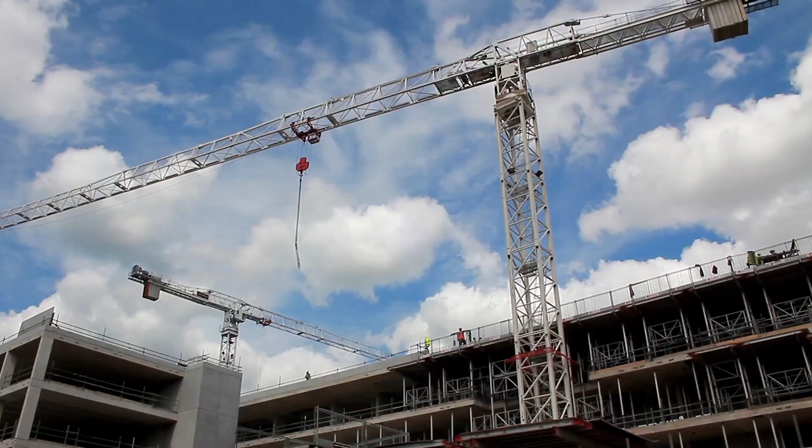Each Czech produces 537 kilograms of municipal waste a year. However, this amounts to just 1/5 of the total Czech waste production. Another 4/5 are produced by industry and other operations. Under the law, this waste must be handled responsibly by its producers.

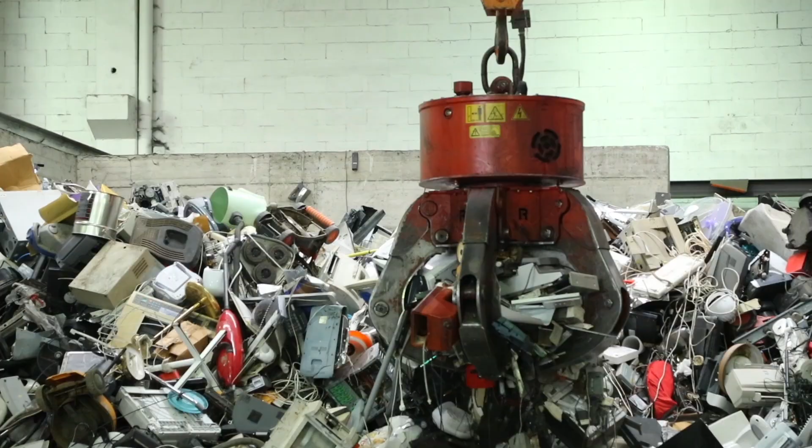Waste from households, commerce and services, the so-called municipal waste, totals 5.7 million tonnes per year. About 40% of this waste is sorted by people into colour-coded containers and in waste collection centres. It is then recycled or composted. And what about the non-reusable waste residues?

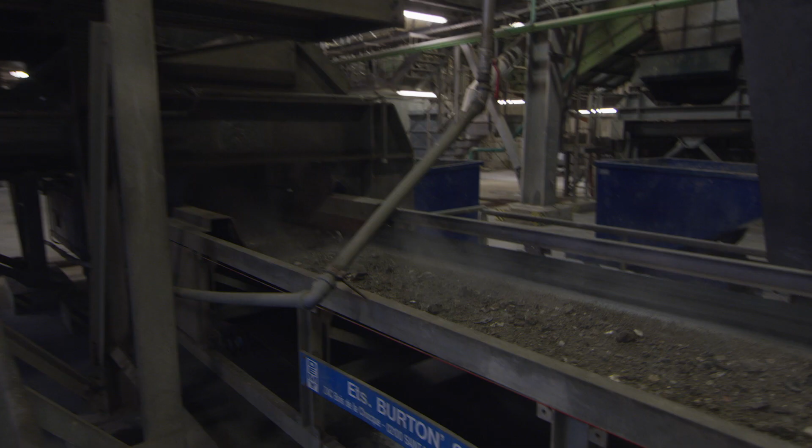A modern and preferred solution to this is waste to energy. Waste recovery, or its legitimate disposal, is also a hygiene obligation. A conventional incinerator only serves to inertize organic matter in waste by incineration, but incinerating can get smarter. Energy from waste is based on thermal treatment of waste and subsequent heat and electricity generation.

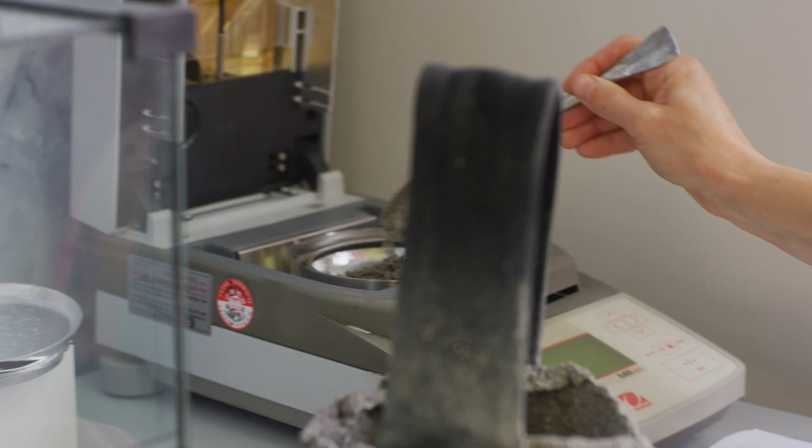These facilities are subject to very stringent European and Czech laws defining technical conditions for the operation and strict emission limits for the monitored pollutants. Waste-to-energy facilities are now part of modern waste management in many developed countries, including the Czech Republic.

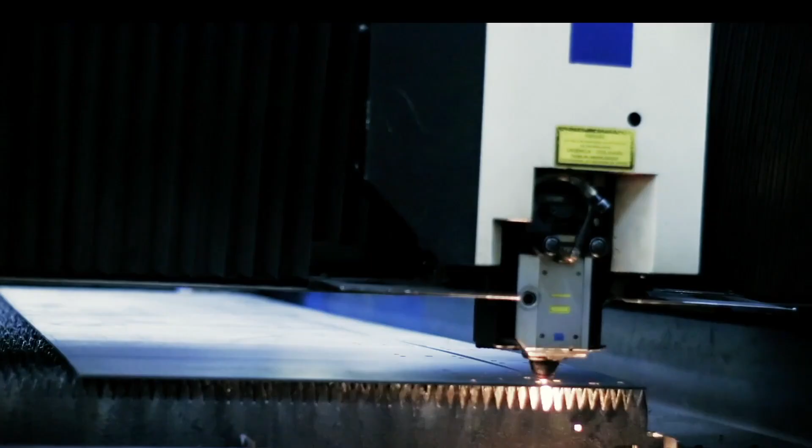At the end of 2015, the European Commission adopted a legal framework for the so-called circular economy throughout the EU. It is based on the fact that we must think about the maximum possible use of everything that the product contains at each and every stage of the product's life cycle. This covers the raw materials, design, production, distribution, use, collection and recycling.

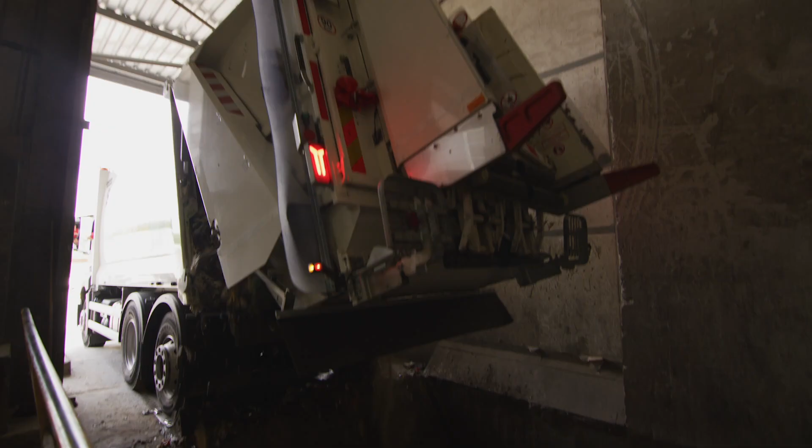Despite the best efforts, there is always some residual waste left at the end of this cycle, and even the residues must be recovered to the maximum possible extent to produce energy. According to data from the European Association CEWEP, there were 492 waste-to-energy plants operating in Europe in 2017. Currently, most of them are in operation in France and Germany.

The situation in Western and Eastern Europe is not the same. While in Belgium, for example, 18 waste-to-energy plants are in operation and serve over 11 million inhabitants, in Hungary there is only one plant for just under 10 million people. Denmark, which is smaller in size and population than the Czech Republic, operates 26 waste-to-energy plants. The Czech Republic has only 4.

The general trend in developed European countries is to reduce landfilling as much as possible and protect natural resources. In a number of European countries, such as Germany, Austria, Switzerland, France and others, landfilling of untreated municipal waste has been banned for many years, and most waste is used for energy production.

The 4 waste-to-energy plants currently operating in the Czech Republic are in Prague, Liberec, Pilsen, and the only one in Moravia and Silesia, SAKO Brno. How do we care about waste in Brno? The second largest city in the Czech Republic treats its municipal waste in a very responsible manner in all aspects. Thanks to our sophisticated system, less than 3% of municipal waste production is put in landfill.

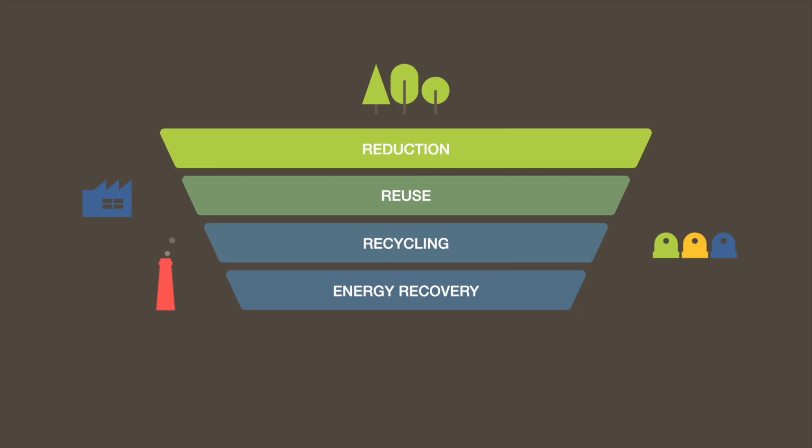Municipal waste disposal in the city of Brno is based on the principle of strict adherence to the following hierarchy. Primarily, it focuses on the reduction of waste production and its preparation for reuse. This is followed by recycling, energy recovery, and finally landfilling.

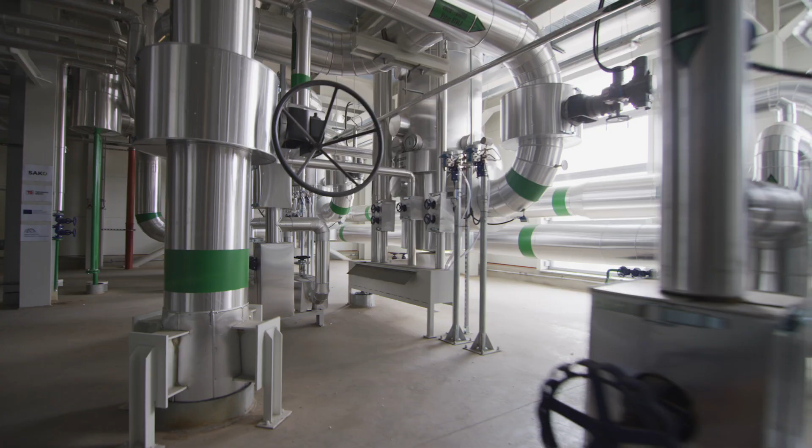Waste collection and the distribution of energy for Brno are ensured by 500 employees. SAKO has a modern fleet of vehicles, a sorting line and state-of-the-art waste-to-energy technologies.

And which waste is the best? The one that is not produced at all. This is a smart and responsible idea. Discarded but still functional items are given to those who need them and can still get some use out of them. Based on this principle, several reuse projects to benefit the public have been ongoing in Brno.

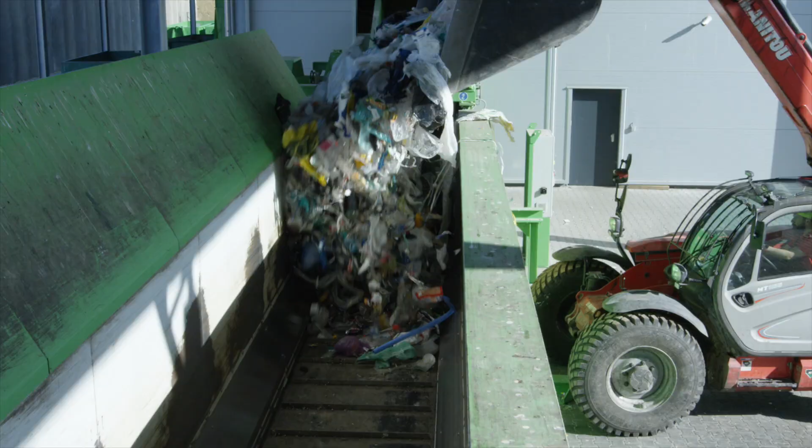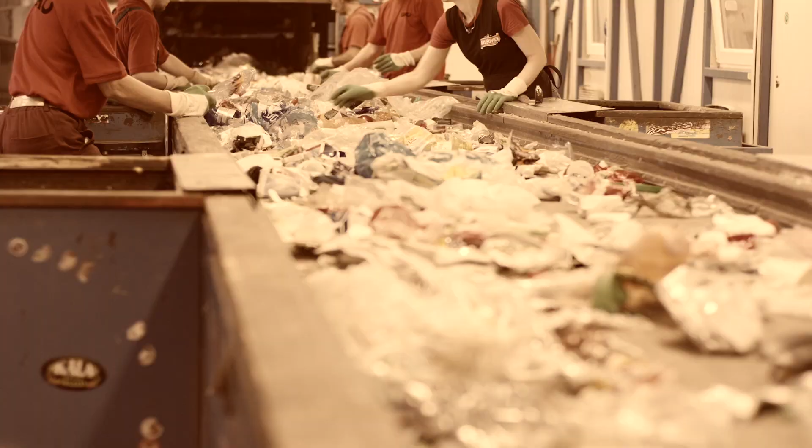SAKO Brno collects waste from the city and its surroundings into two facilities, the waste-to-energy plant and a sorting line. Since 2023, this line has been semi-automated and is the first of its kind in the Czech Republic. Where previously sorting was done only by hand, the automated process is now much faster and more efficient.

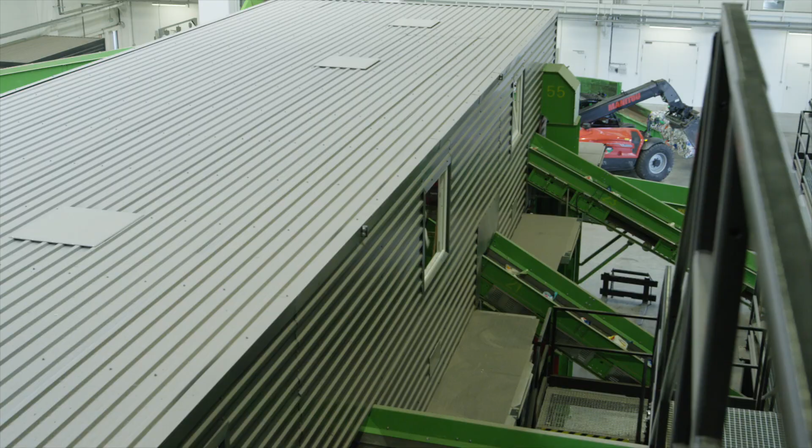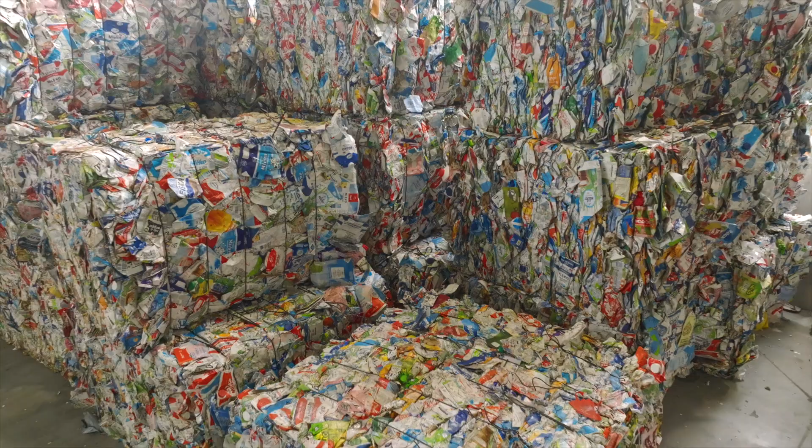A system of separators recognizes plastics by shape, composition and even color. It sorts the content of the yellow containers into 10 commodities, such as PET bottles, polypropylene, polyethylene, Tetra Pak and others. Magnetic and inductive separators extract ferrous and non-ferrous metals, such as food tins and beverage cans.

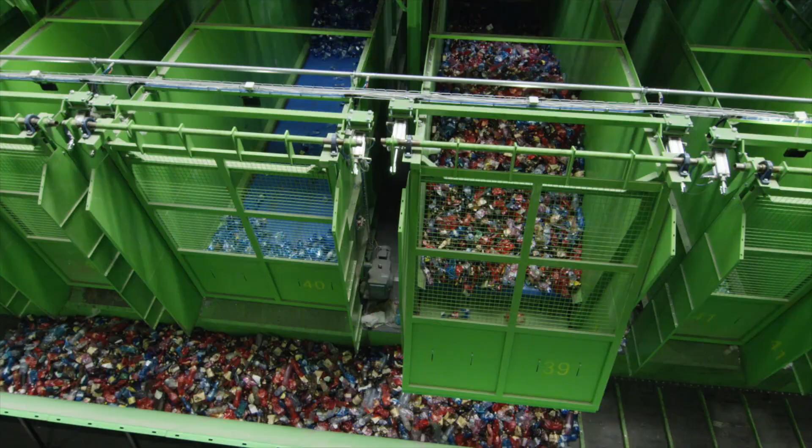The new line can process the contents of 2 full garbage trucks per hour and up to 15,000 tonnes of pre-sorted waste per year. It serves not only the city of Brno, but also other municipalities. This way we can now capture everything that can be recycled and ensure maximum utilisation of the sorted waste.

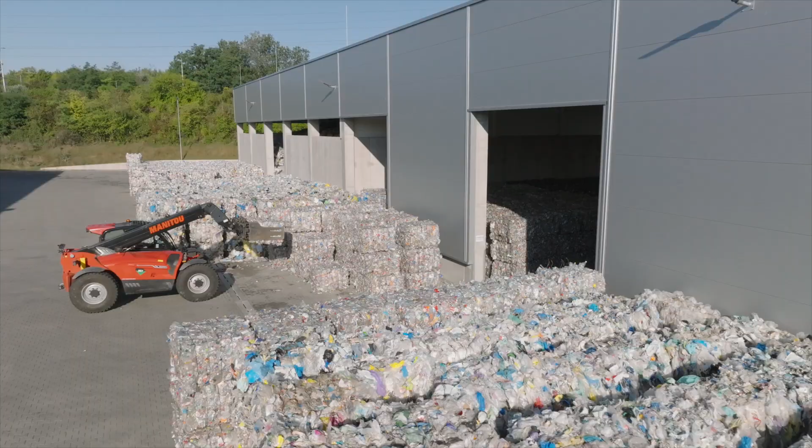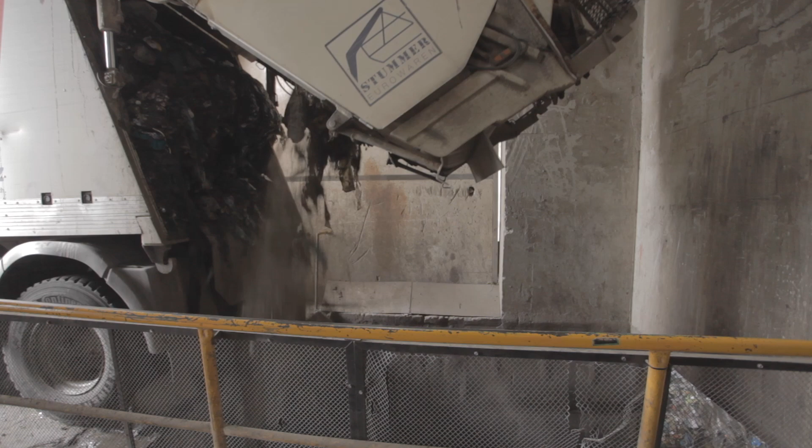The second facility located at the same address is the waste-to-energy plant. Let's go through the whole process from the very beginning. The journey of every waste starts on the weigh station. Weighing is automatic and is processed by special software. Collection trucks pass through a detection system that can detect sources of ionizing radiation. As a result, no radioactive materials hidden in the waste will enter the site.

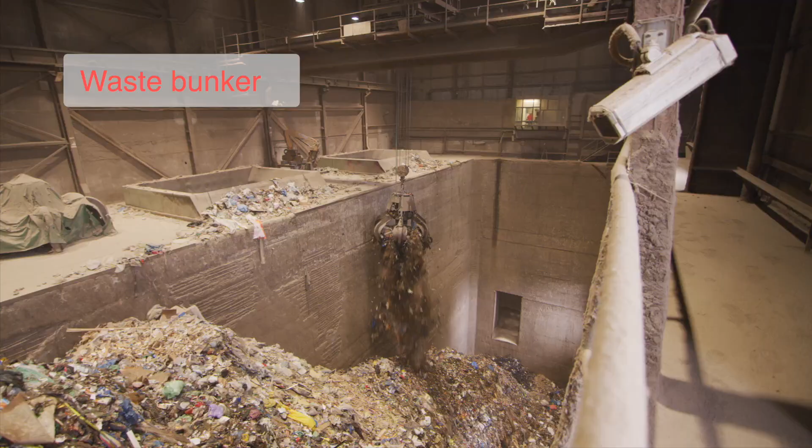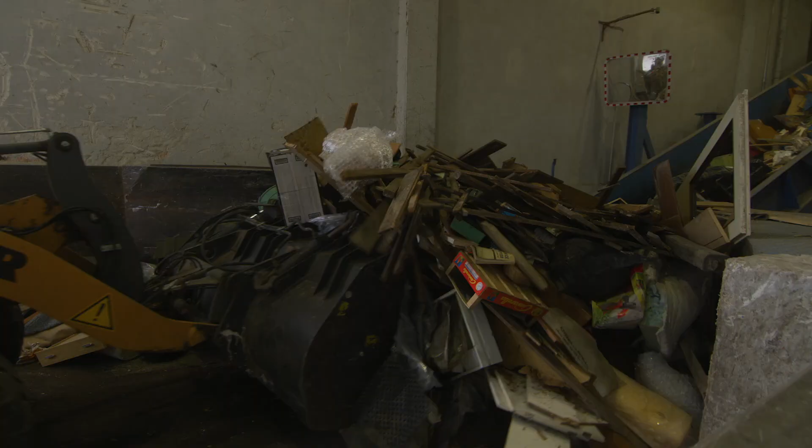Larger items are first fed to a shredder. A number of municipal waste analyses are performed 4 times a year in order to determine its qualitative composition. From a chemical point of view, the waste brought to the site contains almost the entire periodic table of elements. 2 polyp grabs extract waste from the unloading pits. First, they homogenize everything so that the resulting mixture has a similar calorific value. The grabs then feed the waste to individual boiler hoppers.

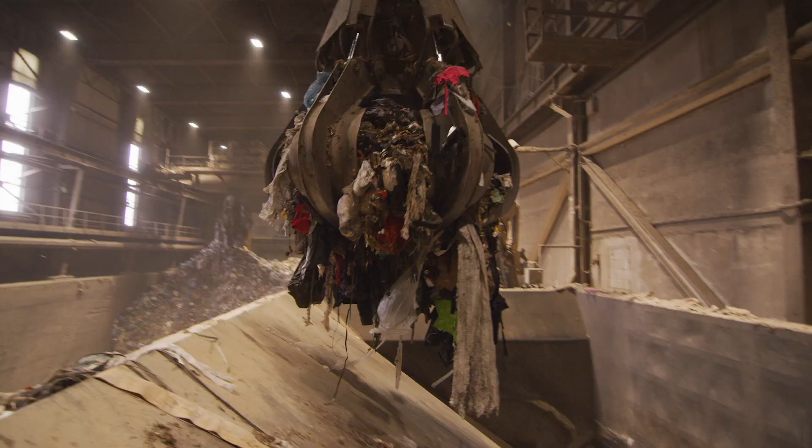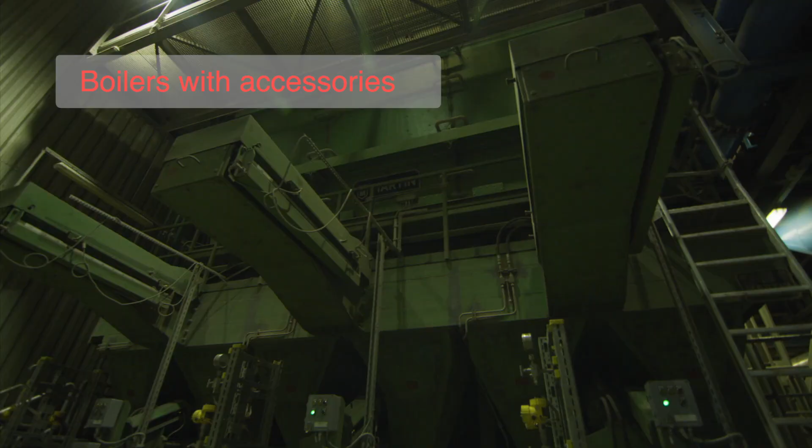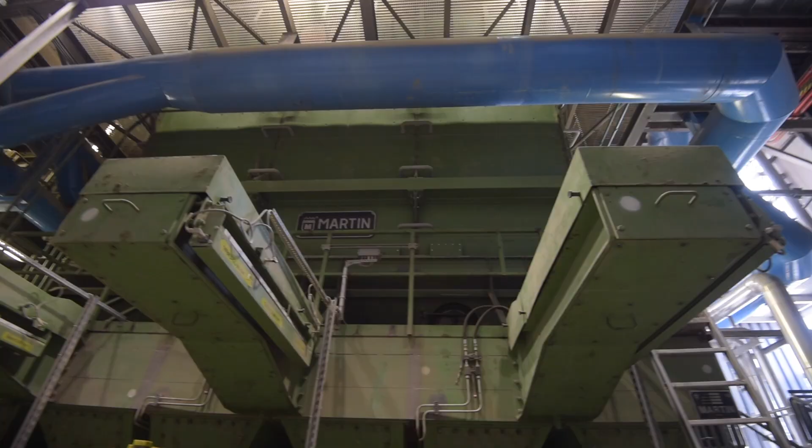A permanent weak underpressure is maintained in this bunker by sucking out the air which is used in the incineration process. As a result, the waste smells less and no dust is formed around the bunker. In the boiler room there are 2 vertical 5-pass steam boilers with reciprocating Martin-type grates developed specifically for solid municipal waste incineration. The waste passes through a water-cooled hopper and by means of a feeding device with a hydraulic drive is evenly distributed on the combustion grate of the boiler with an area of 45.5 square meters.

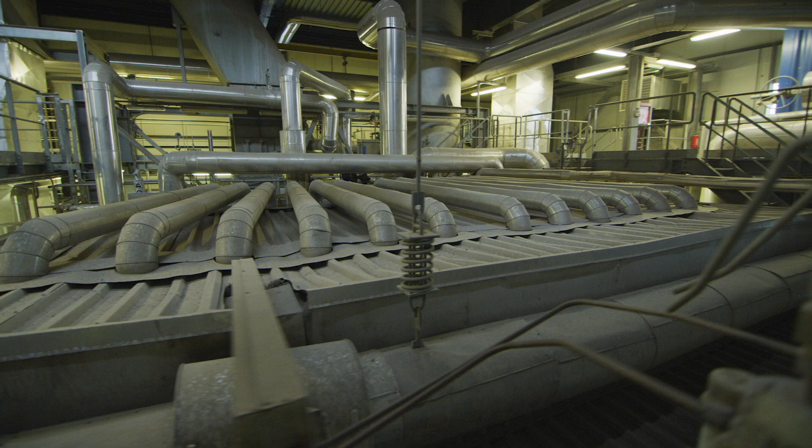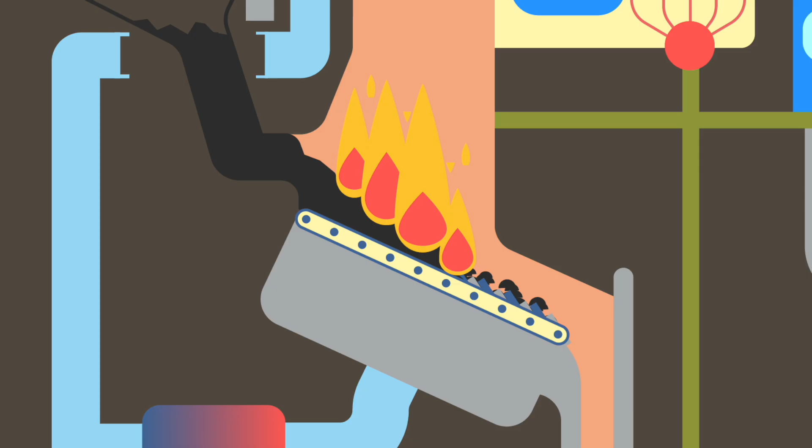This solution enables the setting of the optimal incineration regime according to the calorific value of the incinerated waste. The grate bar's movement spreads the waste over the entire grate area. This ensures a perfect burn of the combustible waste components and a low production of pollutants. The usual calorific value of waste as a fuel is 8 to 11 megajoules per kilogram.

SAKO supplies around 1 million gigajoules of heat per year to 100,000 Brno households connected to the district heating network, which covers 1/3 of their consumption. We supply around 50,000 megawatt-hours of electricity per year to the power grid.

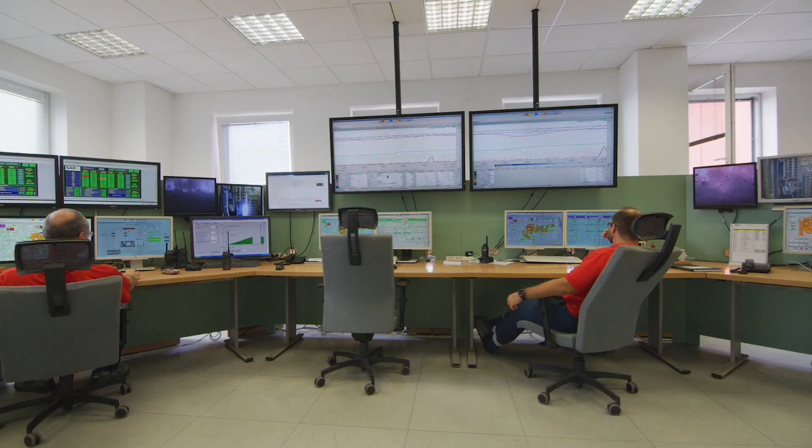The whole incineration process is controlled from the central control room. For a cold start, the combustion chamber must first be heated to 850 degrees Celsius using a natural gas burner. Waste fed to the preheated combustion chamber ignites immediately and no additional fuel is needed.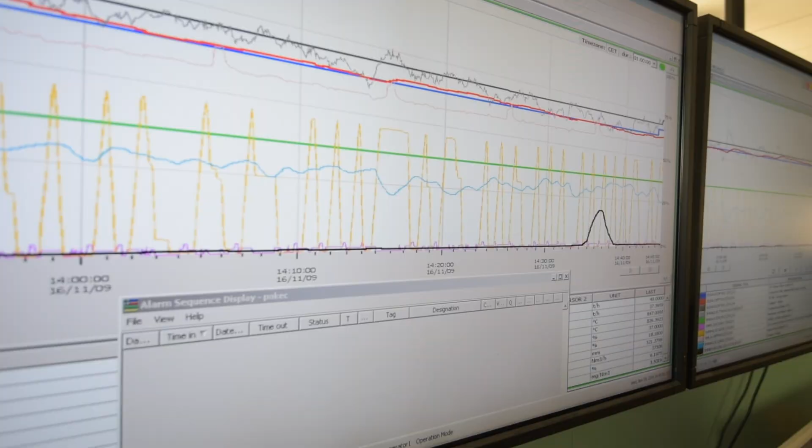Waste remains on the grate for an average of 30 minutes. However, oxygen is needed to ensure complete burn. Therefore, preheated primary air is fed to the boiler under the grate and secondary air over the grate.

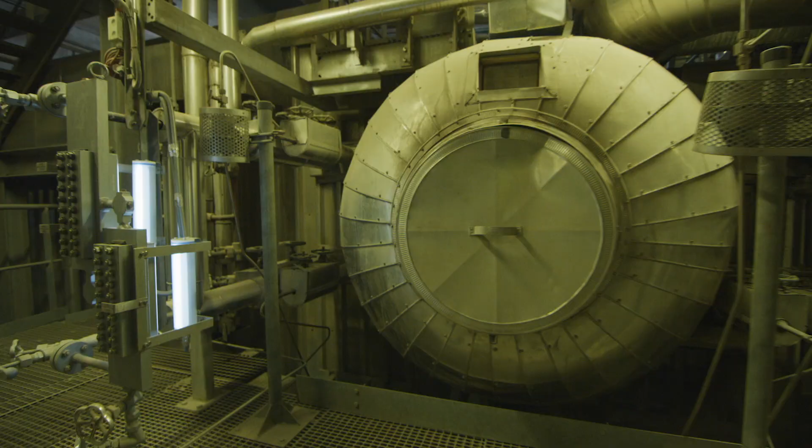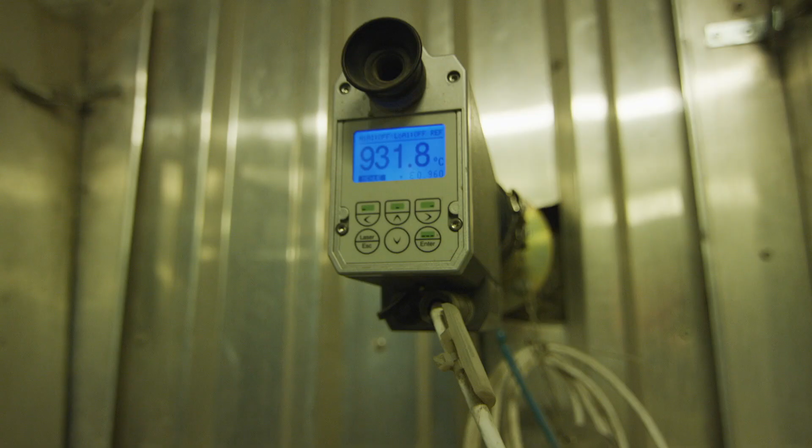The boiler itself is a water tube boiler with natural circulation and 2 drums interconnected to the evaporator and a 2-stage economizer. This is designed to ensure adequate flue gas retention time in the boiler combustion chamber. Organic matter burns down to carbon dioxide at high temperatures of 1000 to 1200 degrees Celsius, which prevents it from forming new thermostable organic matter.

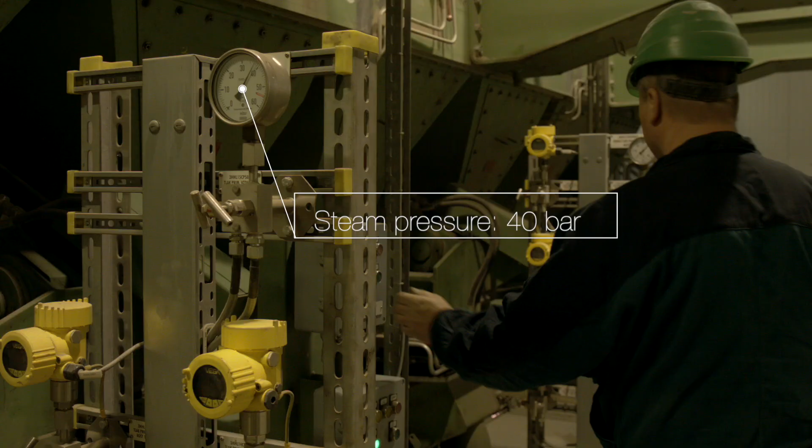From a chemical point of view, the combustion process is an exothermic reaction releasing the maximum possible heat. The released thermal energy is transferred to the boiler water system, which produces high-pressure superheated steam at a pressure of 40 bar and a temperature of 400 degrees Celsius. Superheated steam passes through a steam condensing turbine which has one controlled and one uncontrolled steam extraction.

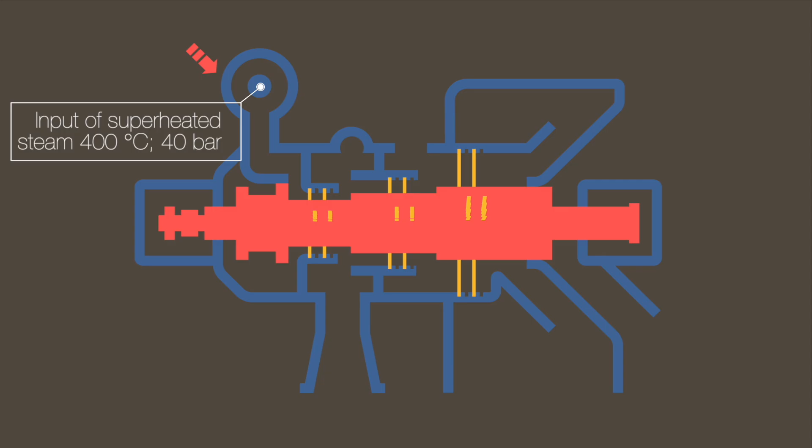The high-pressure superheated steam expands in the turbine and the kinetic energy is transformed into mechanical energy, driving the rotor blades to about 6,800 revs per minute and transmitting the mechanical energy through a shaft to the gearbox, which reduces the revs per minute for the generator. The generator transforms mechanical energy into electricity.

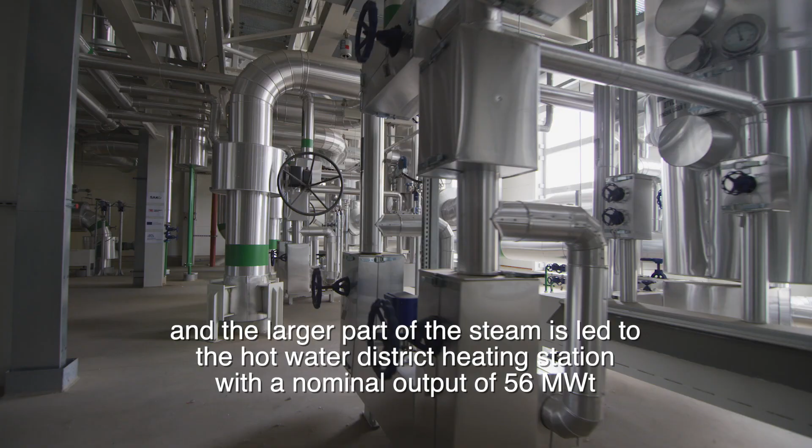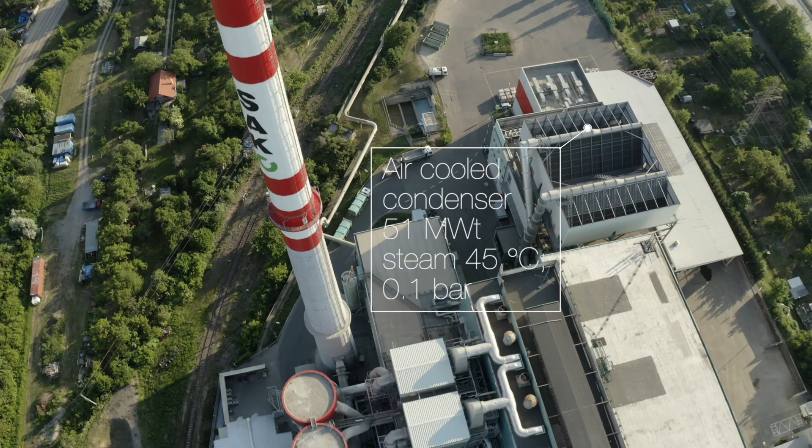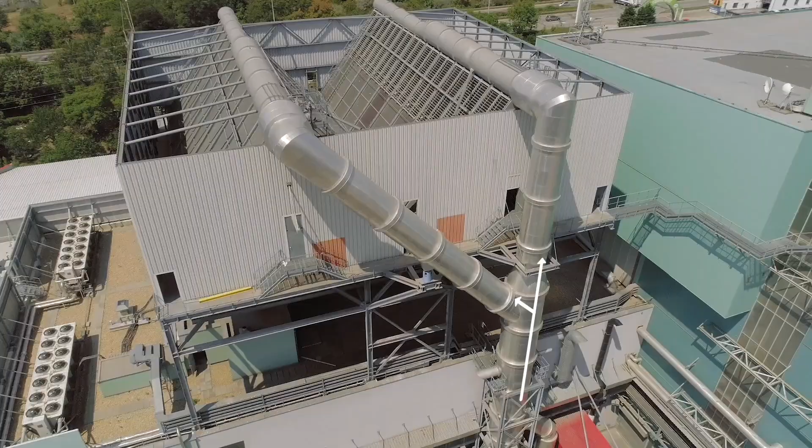The air condenser with a nominal output of 51 megawatts allows the boilers to be operated at a constant output regardless of the heat consumption in the district heating network. The steam from the final stage of the turbine is fed by a steam pipeline to the air-cooled condenser, where it is distributed into 4 sections.

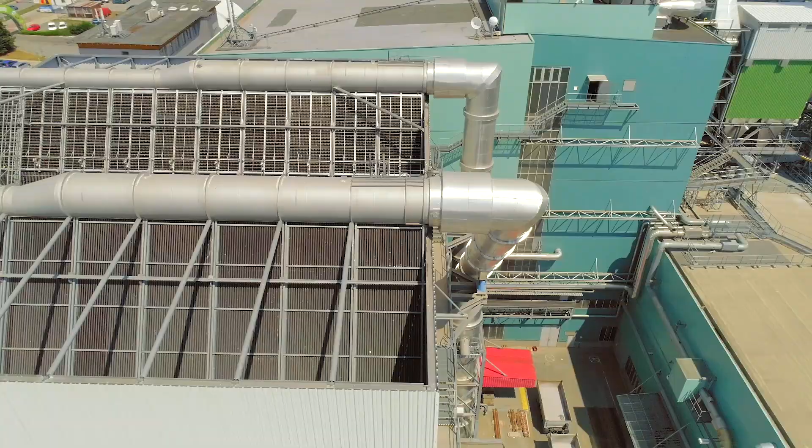Each section has its own fan with a diameter of 10.4 meters, which drives cool air through the rib tubes. This is where heat is transferred by forced convection. Outlet air is heated by approximately 5 degrees Celsius and the steam gets condensed. The condensate returns to the steam production process.

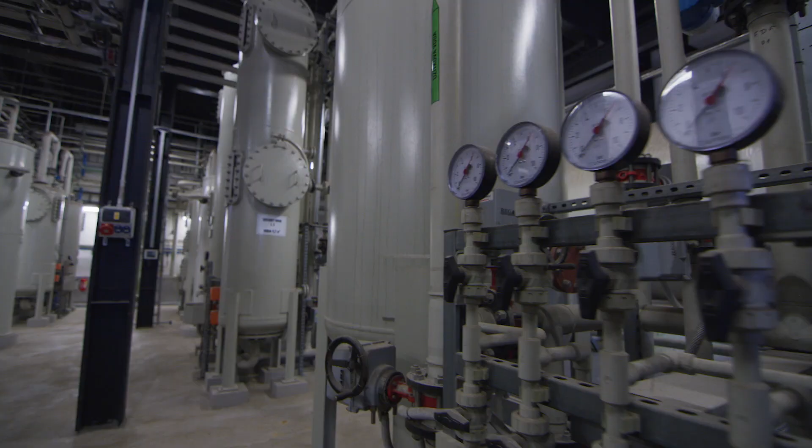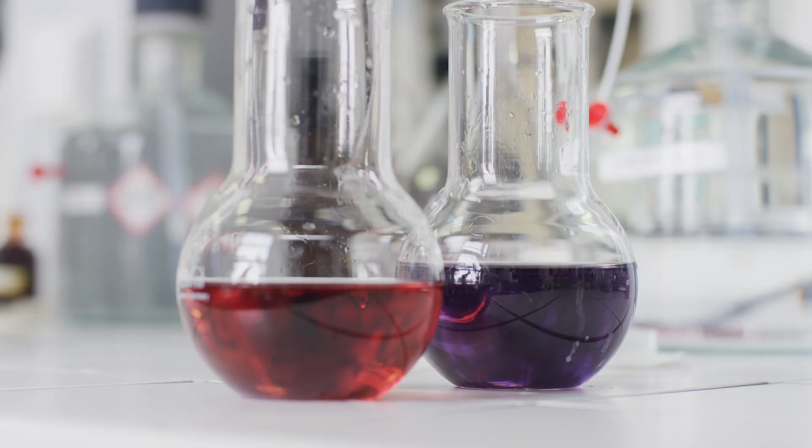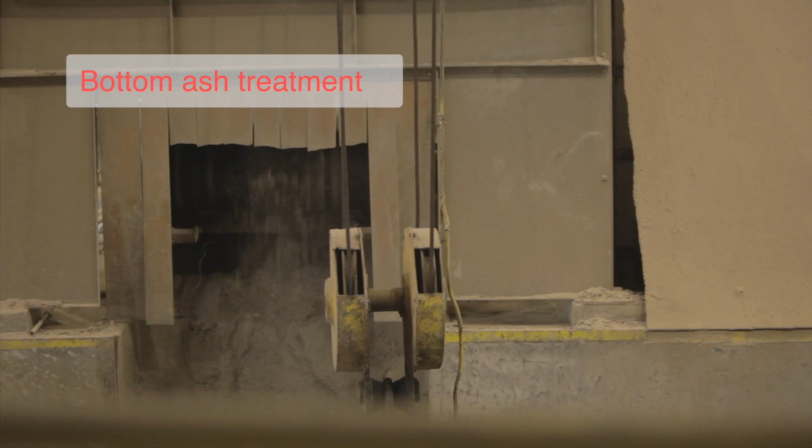To enable periodic monitoring of qualitative parameters of the feed water for the boilers, the boiler water and condensate, an operating laboratory equipped with state-of-the-art equipment has been established. Bottom ash is an inert inorganic material remaining after the combustion process. Bottom ash falls from the boiler to the bottom ash extractor with a water trap, ensuring that no uncontrolled air can be sucked into the boiler. Here it is cooled and transported by a belt conveyor to the bottom ash line.

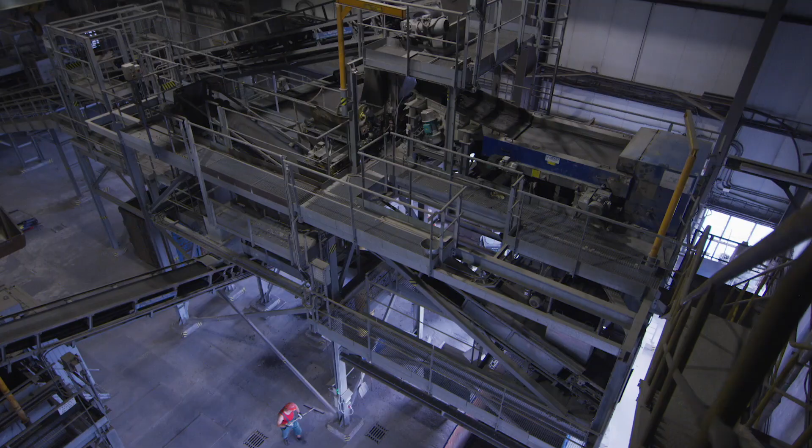The line separates ferrous and non-ferrous metals, especially aluminium and copper, which are transported off-site as secondary raw materials for recovery. Bottom ash is divided into different sized particles. It is then reused in landfill structures. The mission of SAKO is to ensure such bottom ash quality parameters so that it can be used as a building material and thus waste production can be minimized.

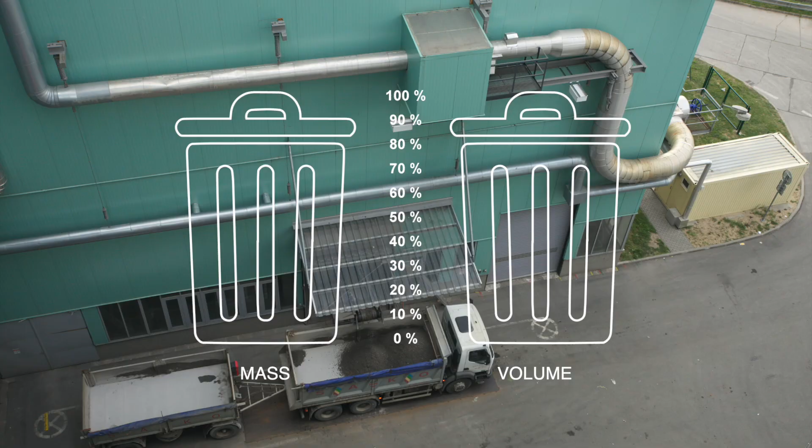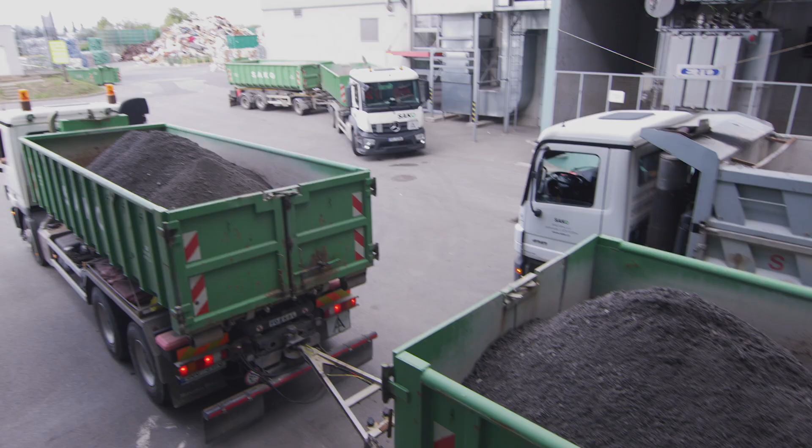Waste loses 3/4 of its weight during the incineration and 90% of its volume. For comparison, a full black dustbin results in a bucket of bottom ash. A ton of waste transforms into 220 kilograms of bottom ash and 30 kilograms of metals can be separated from it.

Some people are worried about smoking stacks, but unnecessarily so, because in SAKO the whole process is under strict control. The flue gas cleaning system forms an essential part of the technological process, consisting of 5 stages. Thanks to this, only a trace amount of pollutants is vented out into the atmosphere. These are only thousandths of a % of the total volume.

For comparison, the results of measurements made by the Czech Hydrometeorological Institute show that, for example, the concentration of harmful benzo(a)pyrene in small municipalities in the heating season is usually up to 18 times higher than in Brno, with all its transport, industries and, of course, our facility.

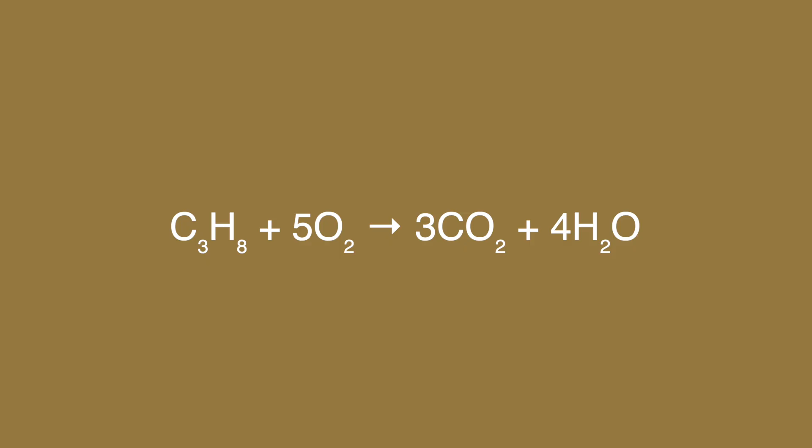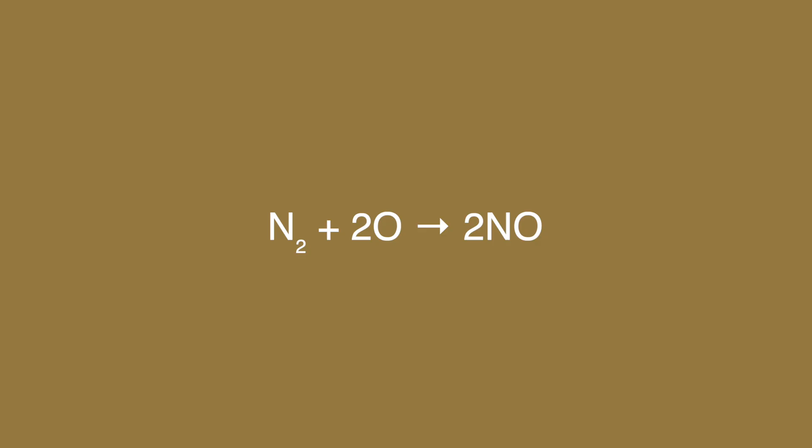Let's take a closer look at this process and study the chemistry behind it a bit. The bound organic carbon reacts with air oxygen at high temperatures to form carbon dioxide and water with a release of heat. The incineration process is also accompanied by reactions of biogenic elements contained in the waste, such as nitrogen, sulfur, hydrogen with oxygen, and chlorine and fluorine with hydrogen.

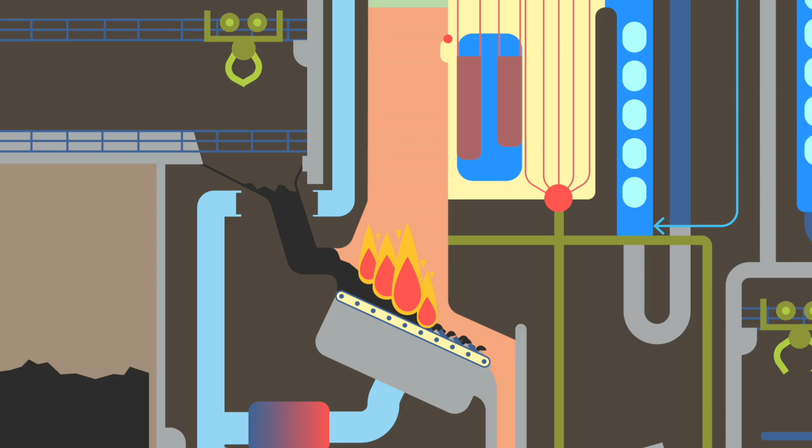The first stage of flue gas treatment is based on the principle of selective non-catalytic reduction and ensures a significant reduction of nitrogen oxides in the flue gas. The system uses the reducing properties of a 40% aqueous solution of urea, which is injected into the boiler combustion chamber in areas where the flue gas temperature is in the range of 900 to 1050 degrees Celsius.

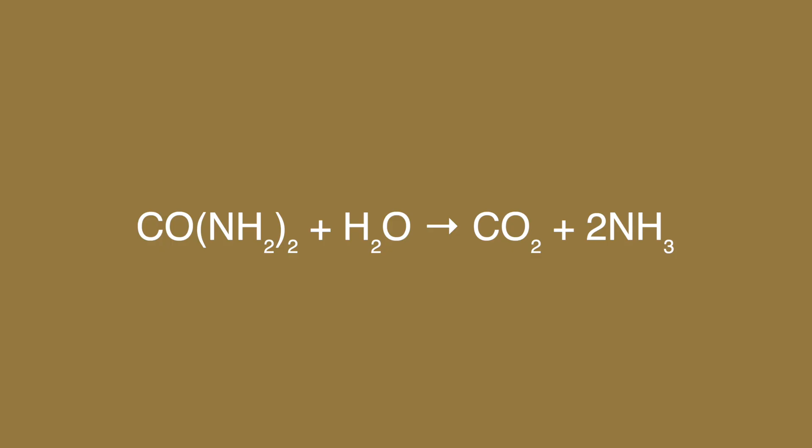Nitrogen oxides are formed during the reaction of oxygen and nitrogen, which comes primarily from 2 sources: fuel, for example, from biowaste, and from the air. An undesirable chemical reaction accompanying surplus urea is the formation of gaseous ammonia, the so-called ammonia slip. The reduction of nitrogen oxides concentrations after urea injection into the combustion chamber can be briefly described by the following chemical reactions.

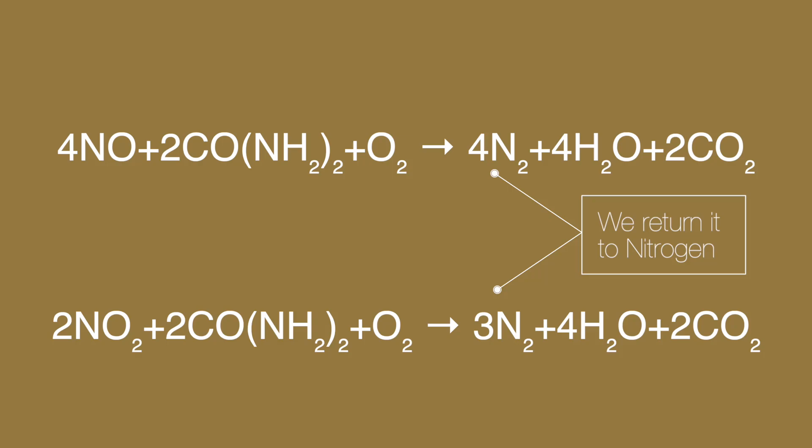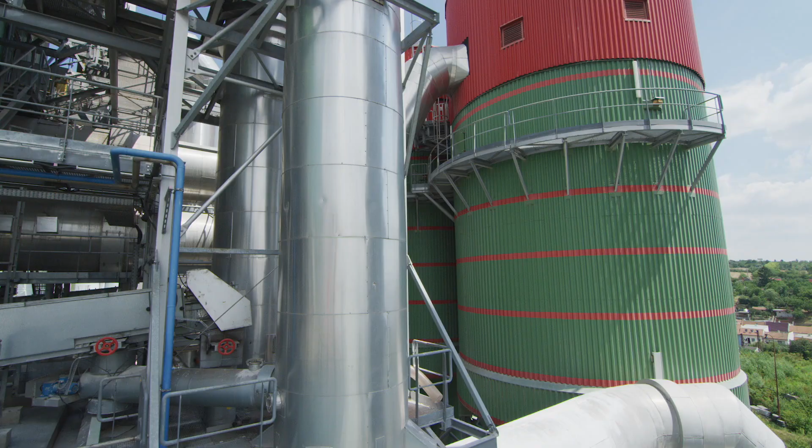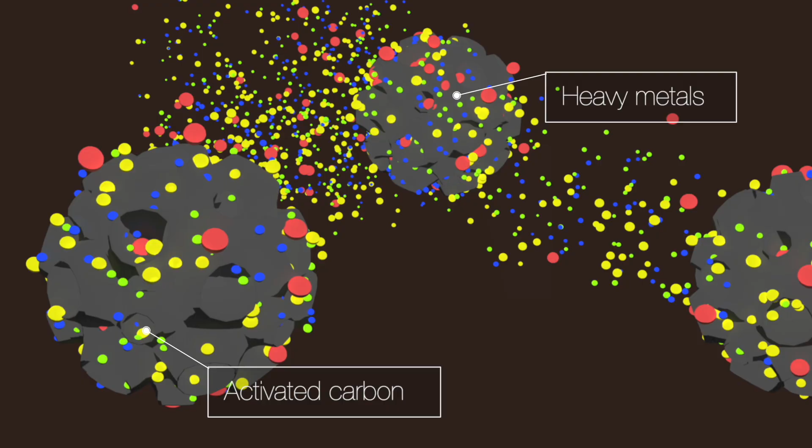The second stage of flue gas treatment uses activated carbon, which binds heavy metals and dioxins to its surface. Heavy metals enter waste on metallized objects or are part of dyes and get released during incineration. Activated carbon also retains unburnt or recombined organic matter, including toxic polychlorinated biphenyls, polyaromatic hydrocarbons and dioxins.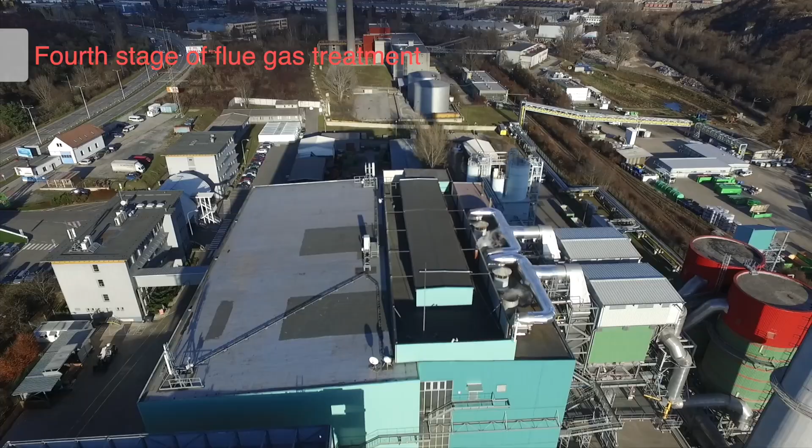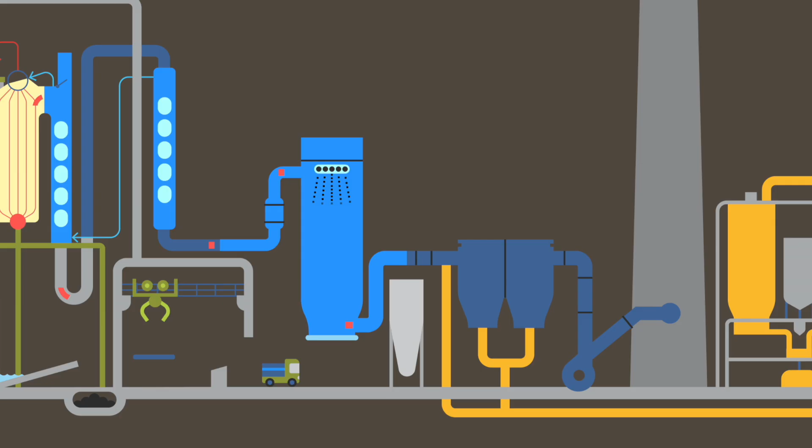The third stage of flue gas treatment, the so-called semi-dry lime method, is based on injecting finely sprayed aqueous lime suspension into the flue gas stream. This so-called lime milk is used to neutralize acidic components formed during thermal reactions. The fourth stage of flue gas treatment is based on the dry lime method. It starts automatically in the case of increased concentrations of acidic components in the flue gas. Dry calcium hydroxide is blown into the flue gas under pressure, and this increases the treatment efficiency to the required parameters.

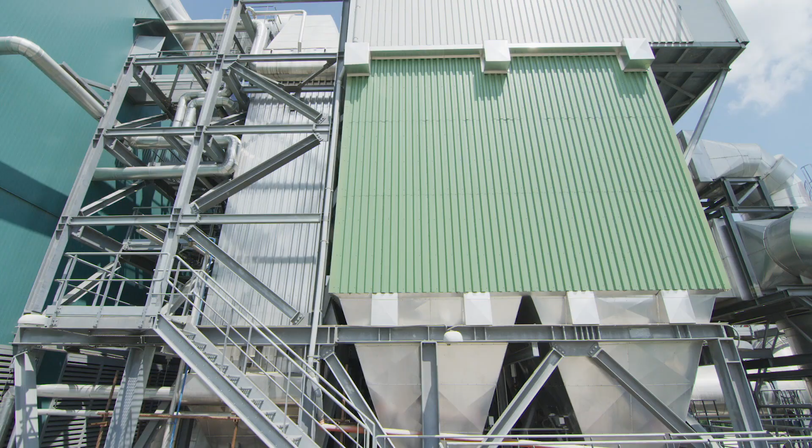The fifth stage of flue gas treatment consists of fabric filters. This is where the last chemical reactions take place and where all mechanical pollutants are trapped, such as fly ash, flue gas treatment products and surplus reagents. This fine dust is called the end product. It is pneumatically blown into silos, from where it is transported off-site as hazardous waste in special trucks for further processing.

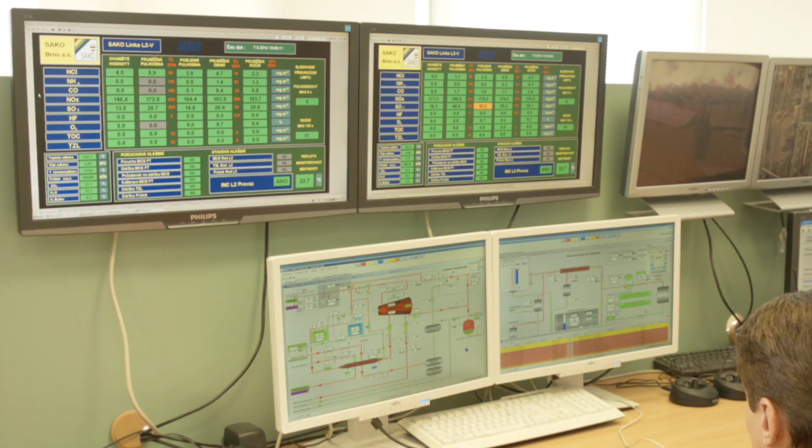Before entering the stack, the treated flue gas is monitored every second by sensitive analyzers, and the treatment process is controlled by an automatic control system based on that data. The flue gas treatment efficiency is 99% for most pollutants.

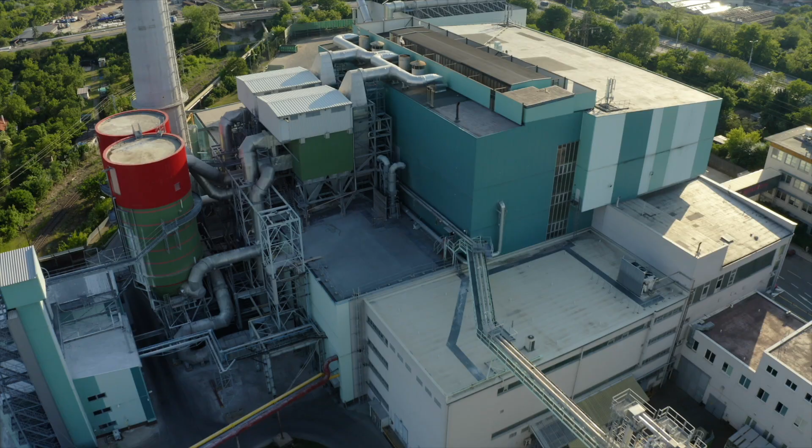SAKO Brno works and serves the current needs of Brno, the South Moravian and neighbouring regions. We have a clear vision and plans for the future. We respond to new requirements, goals and developments in waste management through constant innovations. The district heating network is many times more efficient and beneficial for the environment than thousands of local boilers. With regard to global warming, the municipal waste-to-energy process is CO2 neutral.

Electricity supplied by SAKO covers a one-year consumption of 20,000 households. In the summer, SAKO supplies heat for the entire district heating network, and in the winter months it efficiently correlates with other sources in the system. It is also part of the critical infrastructure of the South Moravian region in the case of a blackout.

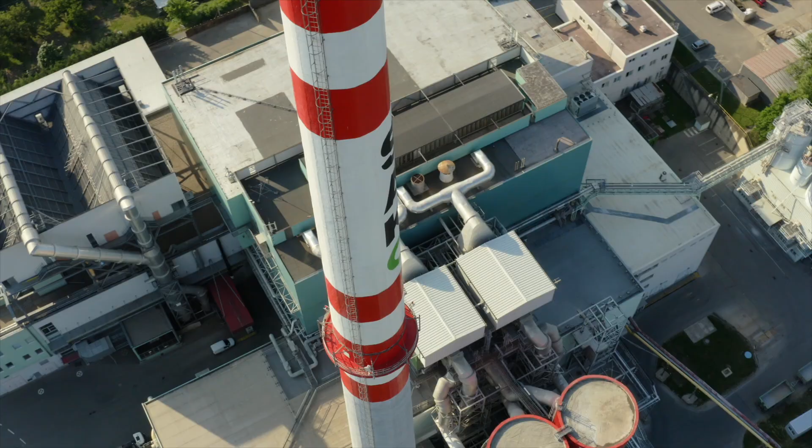In the past, people treated waste as something that was just put in containers and were not interested in its fate. We at SAKO Brno are proud that thanks to our meaningful projects and raising public awareness, the way of thinking is changing for the better. This shows that minds and boilers alike are on fire at SAKO.